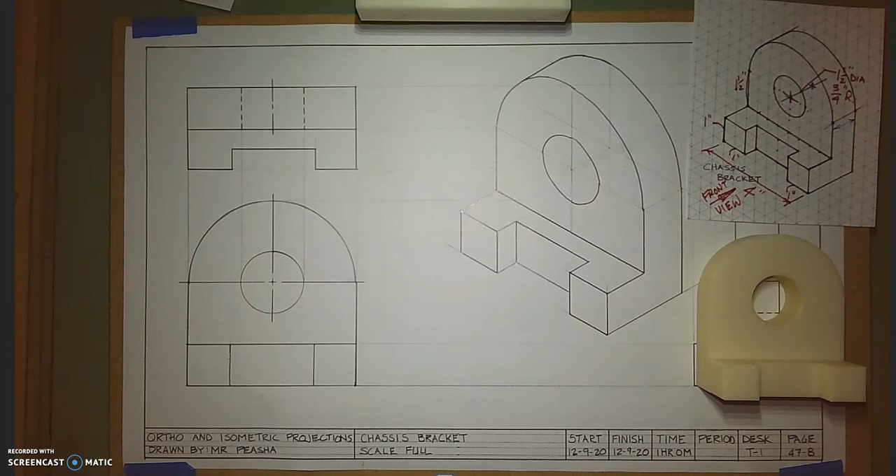Welcome back. The purpose of this video is to demonstrate how to create a compass for the radius on the front view of the chassis bracket.

You'll notice that on the front view of the chassis bracket, there's a circle that has a diameter of 1 1/2 inches, so that means it will have a radius of 3/4 of an inch. You'll also notice the overall part is 4 inches wide, so it's going to have a diameter across at 4 inches, but a radius of 2 inches.

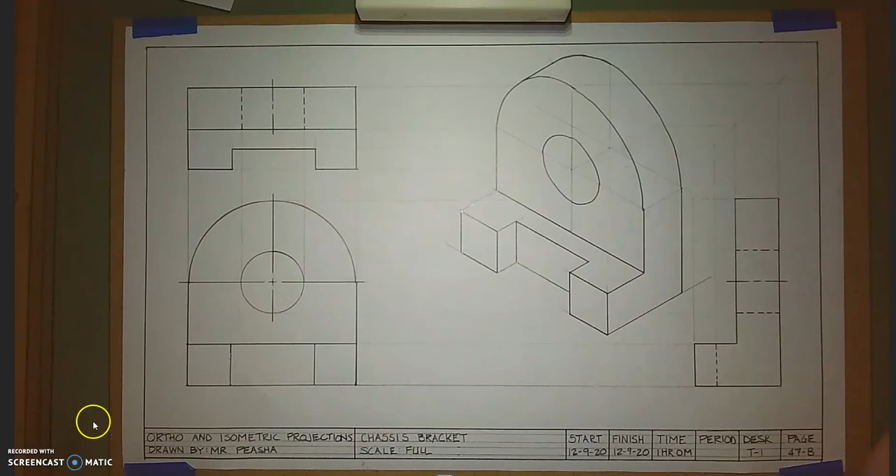The way we're going to build a compass is we're going to use a piece of cardboard and 2 pencils. Using a cereal box, I cut out a strip of cardboard. That strip of cardboard could also be from a shoebox or some thin single layer piece of cardboard.

Once you do that, I'd like you to draw a line directly down the center of this cardboard - just give it a good guess right there. Pick one end of the cardboard and draw a mark, which would be our starting point. Zoom in on that.

Now measure away from that center point or starting point 3/4 of an inch, and then 2 inches.

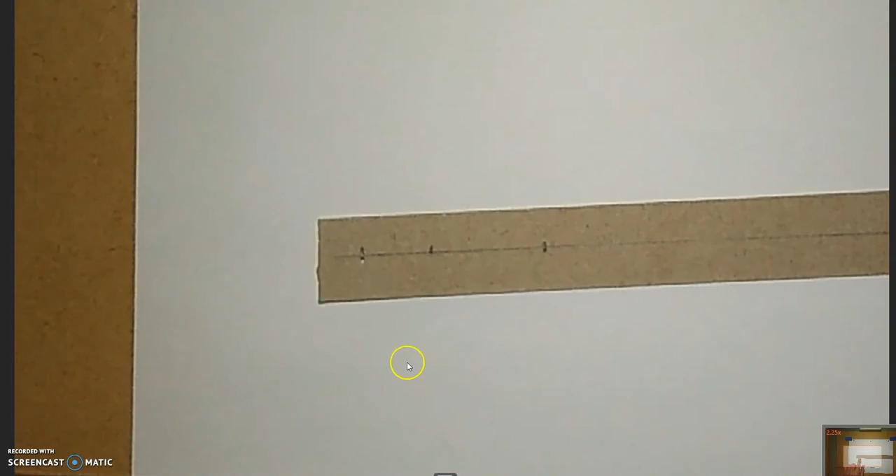What I'm going to do is poke a hole in there just big enough for the tip of my pencil to go through. To do that, I'm going to use a utility knife and a wood backer. This is just a piece of scrap plywood from doing some of the laser cutting in class. So I'm just going to poke a little hole in there at each point.

Just enough to poke my pencil through. So then I can poke this pencil through that cardboard carefully at each point. You can poke this hole with anything as long as you're careful. Once you've put those 3 holes in there, I'm going to trim the cardboard so that I have now a compass that I can use.

To use this compass, I will hold one point down. If I had a center point here, using a pencil with no lead sticking out, I can put that on the center point. And as I hold that there, I can use my pencil with the lead, rotating around that center point to draw both of those circles.

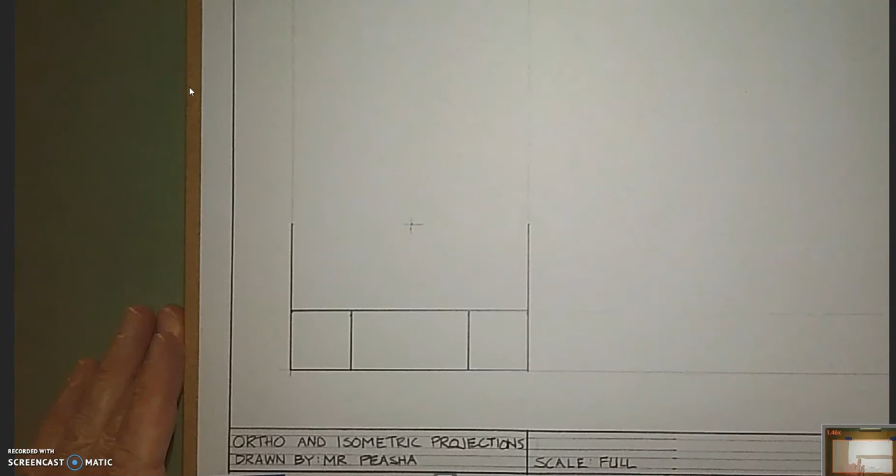And now, to draw on, it'll be a little bit easier to place the pencil appropriately on the drawing.

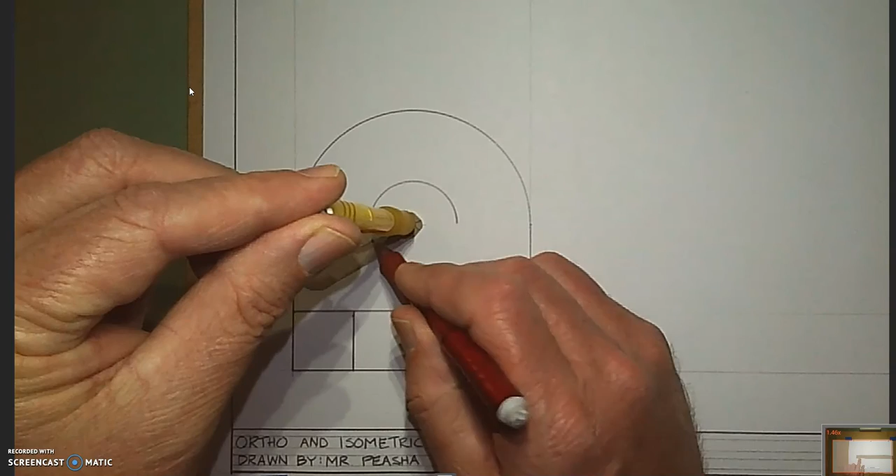To draw the radius and the circle - you do this a little bit better right there, I just got off a little bit. Okay? So that's how you would make a compass using a piece of cardboard and 2 pencils.